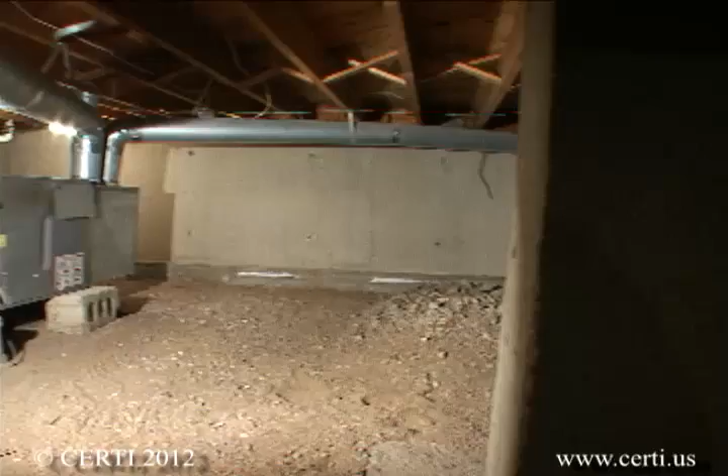The exposed earth of a crawl space provides a major entry point for radon and other soil gases into a home and is an area that should be treated in any radon control project. This is typically done by using a technique referred to as submembrane depressurization, where a durable polyethylene sheet is laid on the soil and sealed to the foundation walls, columns, and its seams.

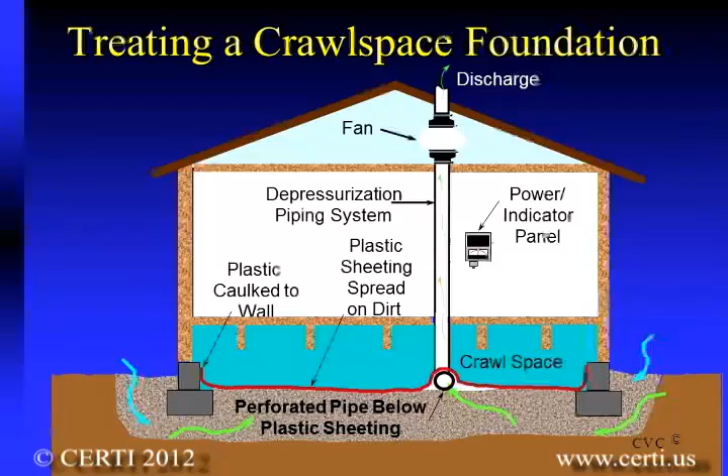Radon is then collected from beneath the plastic sheet with the use of a radon fan and exhausted to a proper location above the eave of the home. Before initiating this work, one should inspect the crawl space for hazards such as friable asbestos, spiders, snakes, and potential hantavirus concerns. If these are encountered, special precautions are warranted, and in many cases a professional should be used to

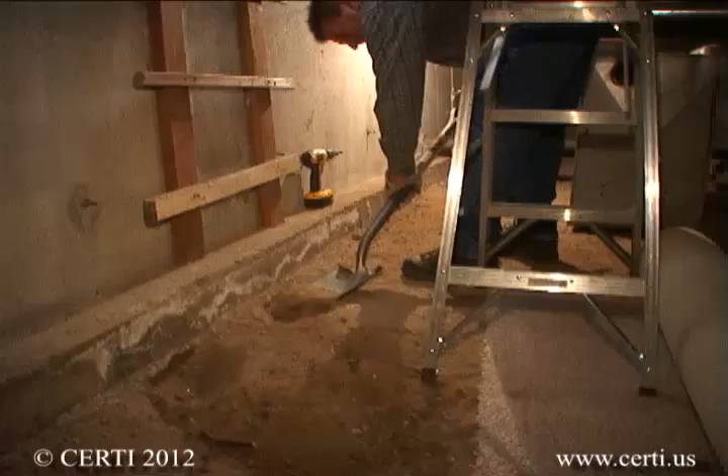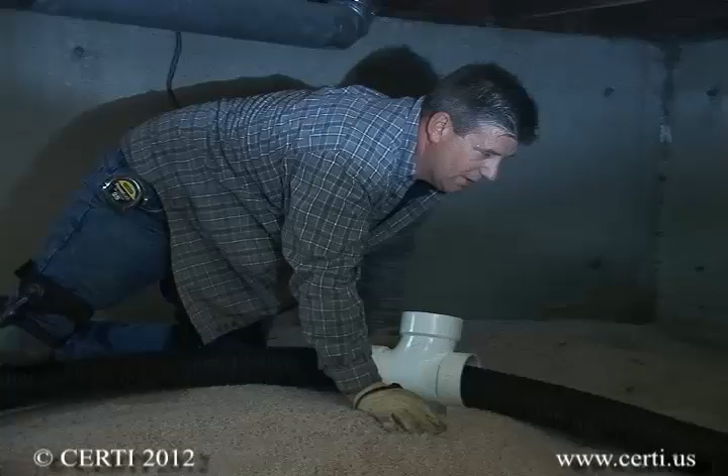implement the repairs. If there are stored materials, excess debris, or sharp objects that may damage the plastic sheeting, these should be removed first. Next, a length or loop of perforated pipe should be laid on the earth with the T-fitting connected to it and positioned in a location appropriate for your planned vent system routing.

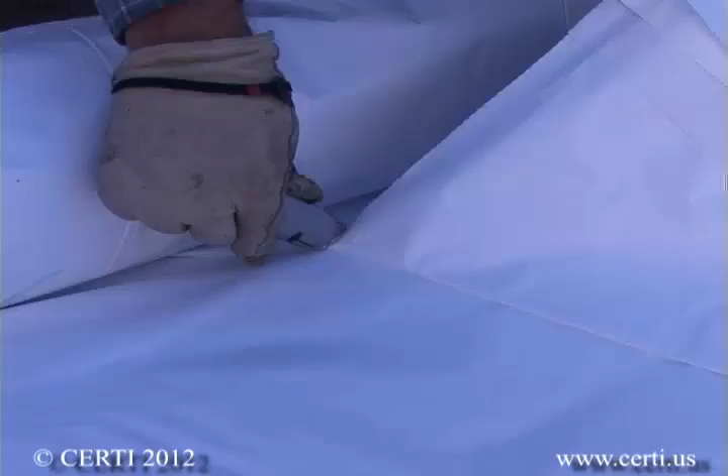Cut the polyethylene sheeting in a convenient location outdoors to the rough dimensions of the crawl space with additional material to allow for overlapping seams and adhering the plastic at least 12 inches up onto the walls. It is also a good idea to lay carpet scraps on the soil in areas of potential traffic to protect the poly when accessing appliances such as water heaters.

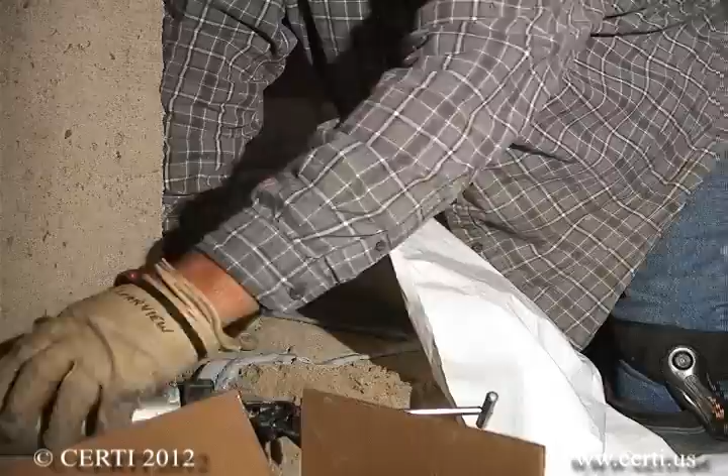Spread a section of plastic out on the crawl space floor beginning with the walls. Apply a thick and continuous bead of polyurethane caulk approximately 8 to 10 inches up on the wall. Press the plastic into the caulk line, which will form an edge seal. Cut your plastic sheeting or use scraps of plastic to seal the barrier to pads and support posts.

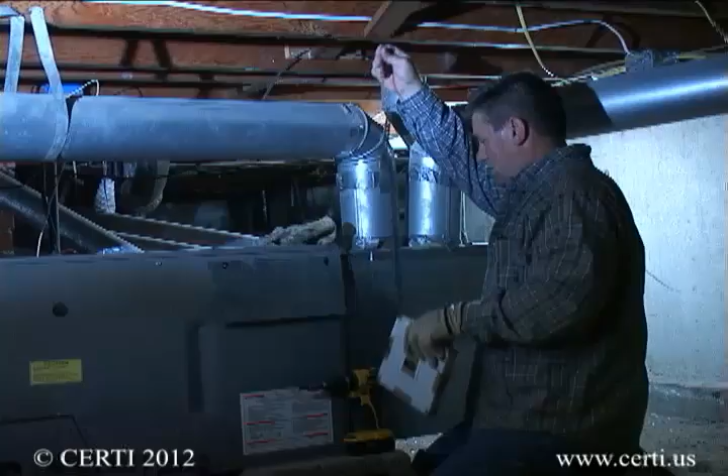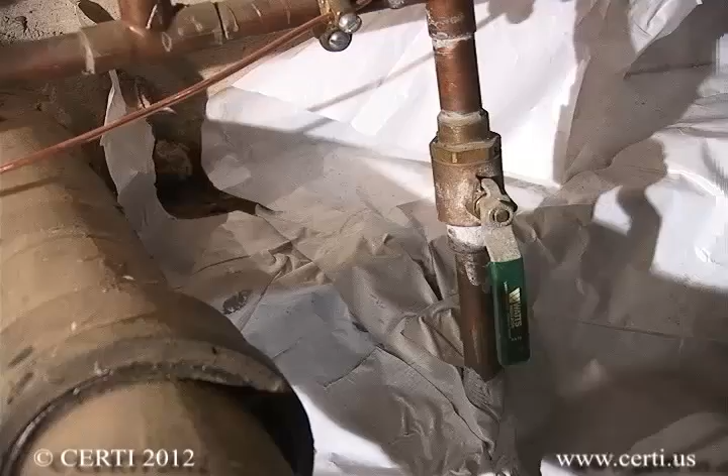If there are appliances such as furnaces in the crawl space, you can seal the plastic to the pad beneath it, or if there is no pad, you can temporarily suspend the appliance with metal strapping, remove the blocks, slide the poly beneath the appliance, and then replace the support blocks. Be sure to also seal around pipes that come up from the soil, such as water or sewer lines, being sure to allow for access to any cleanouts.

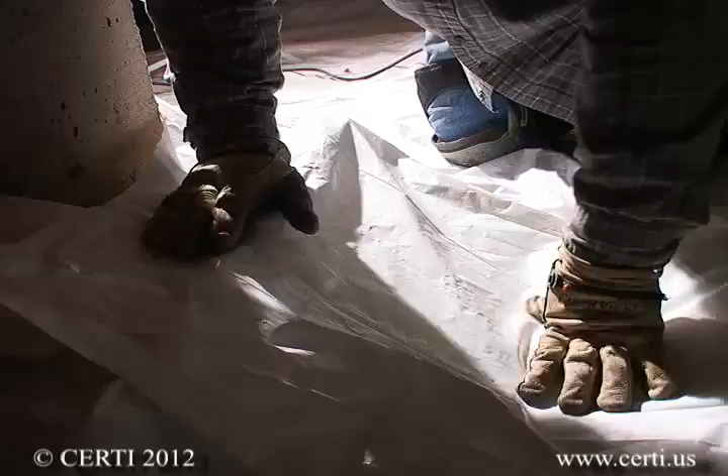After all penetration seals are made, overlap seams and seal them by applying a continuous bead of caulk and overlapping the seam edges. To complete the foundation portion of this system, connect your solid PVC Schedule 40 piping to the riser and route it to your planned vent system.

After the system is complete and the fan is turned on, you will see the plastic drawn down towards the soil, which is evidence of how well the system is working. If you hear leaks or identify them with a smoke bottle, apply additional caulk to seal them.

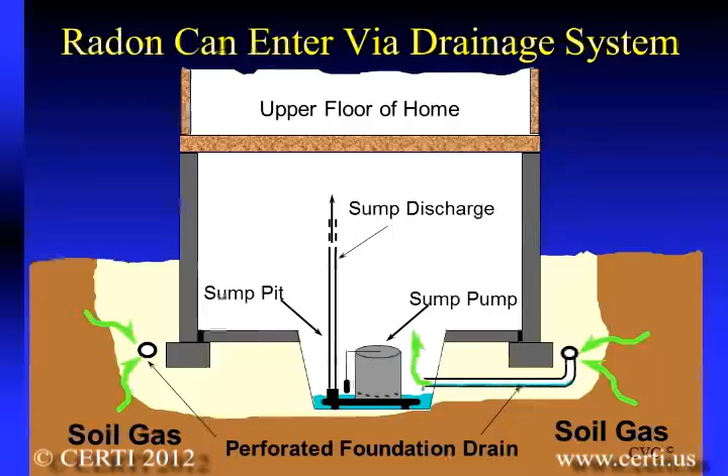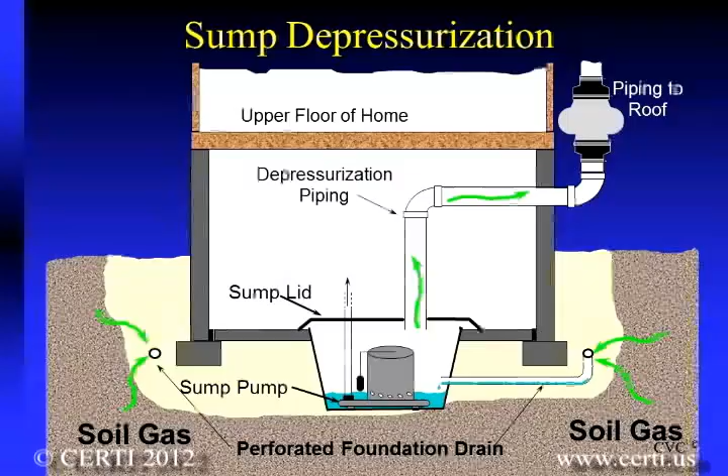Water drainage systems, especially if they are connected to a sump inside the home, can provide an easy pathway for radon to enter the home. However, if you put a sealed lid on the sump and connect your radon venting system to it, you can very effectively reduce radon in your home. Connecting a radon system to a sump is very easy.

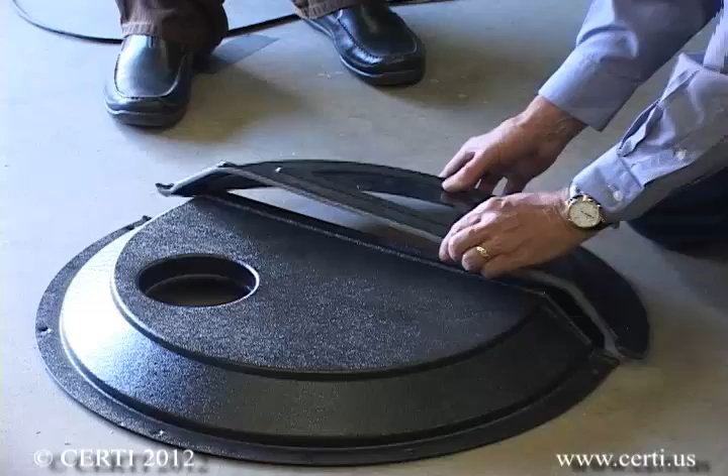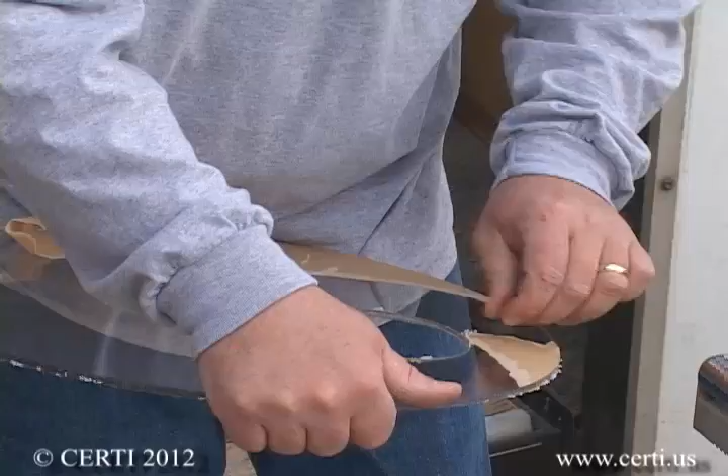There are several commercially available lids that will bolt and seal to the floor, and they also have penetrations for the plumbing from your sump pump as well as for the radon vent pipe. You could also make your own sump lid out of clear plastic such as Lexan, so you can easily look into the sump. If you make your own, you will need to acquire rubber grommets to seal around the pipe

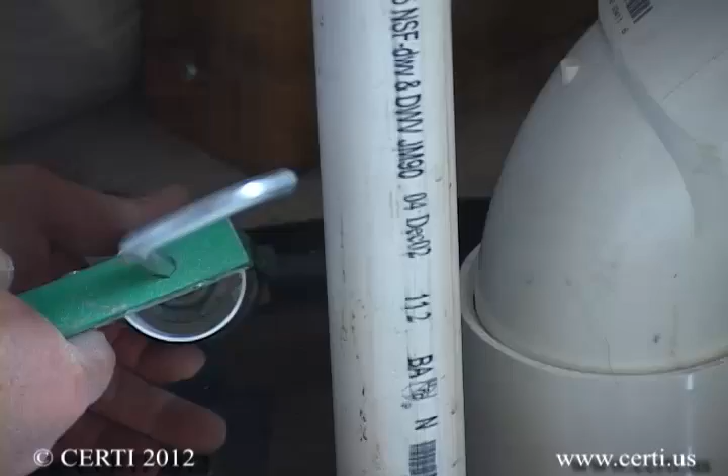penetrations. Regardless of what sump cover you use, it is important to be sure that it seals well to the floor and that you do not do anything that would impede the system from collecting and pumping water away from your foundation. After your sump cover is in place, you can easily connect your radon vent pipe to it and route it to your planned fan location.

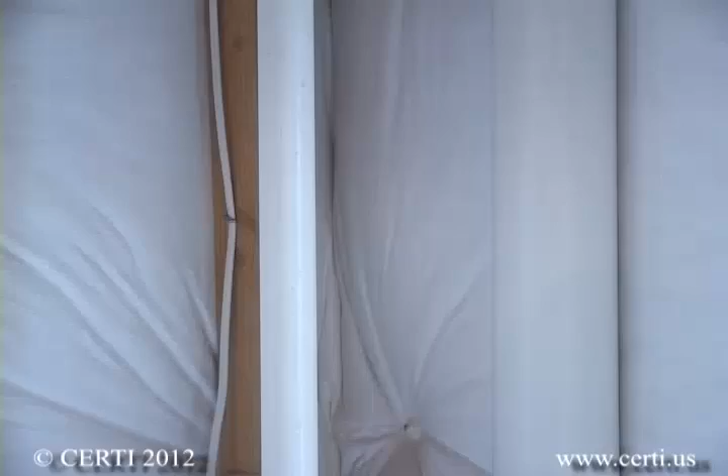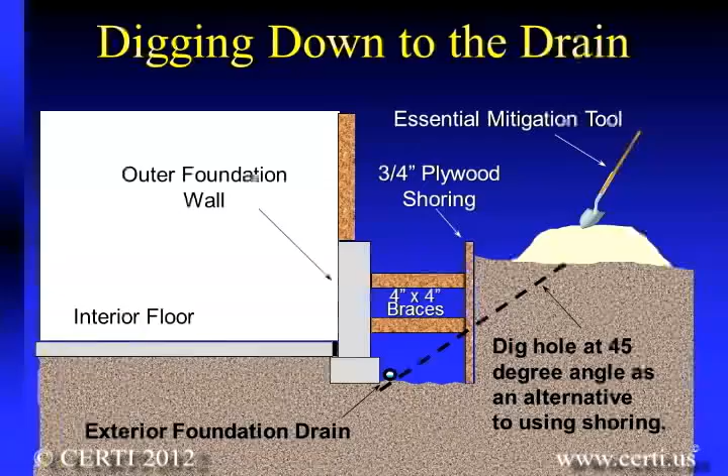If you do not have an interior sump, but rather have an exterior drain located along the footing of your foundation, you can also connect a radon system to it. To connect to an exterior drain, you will have to dig down to the drain, which will typically be near the footing, which will be below frost line. If this is more than 3 feet, you should shore up the hole to prevent it from collapsing in on you. Remove any decorative material or rocks so you can replace it after you are done.

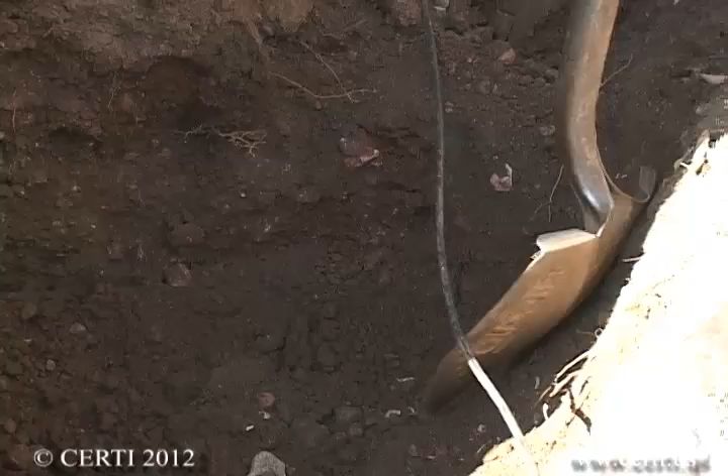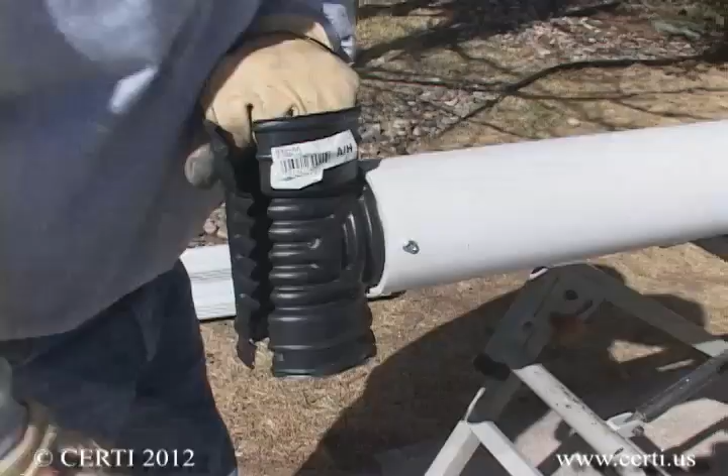It is highly recommended to hand dig down to the drain, carefully avoiding sprinkler and other utility lines. Once you get near the drain, which is located at or below the footing, you will encounter a geotech cloth. Carefully cut and fold this back so it can be replaced later. Once the drain is exposed, connect your 4-inch Schedule 40 PVC or ABS radon vent pipe to the drain. Then lay the geotech cloth back over your connection. Replace the excavated dirt, compacting it as you go, at least once every 6 inches.

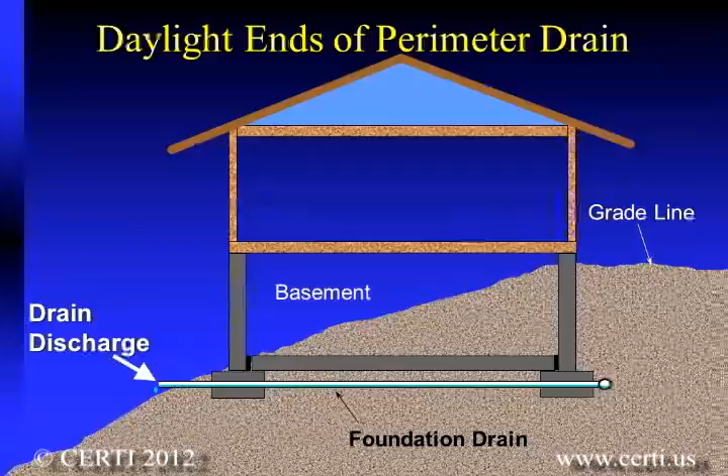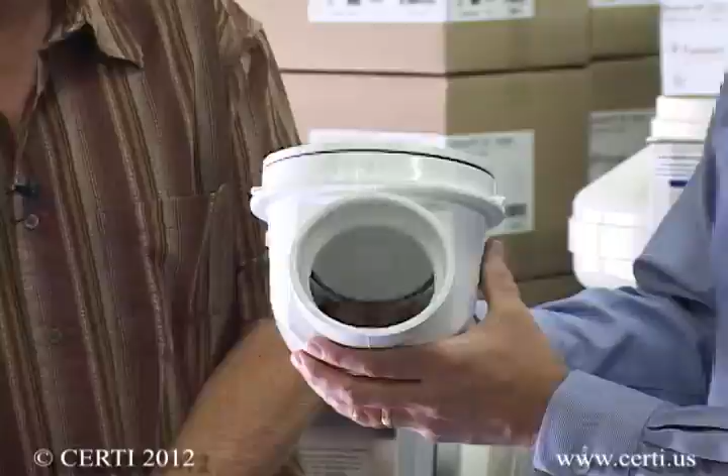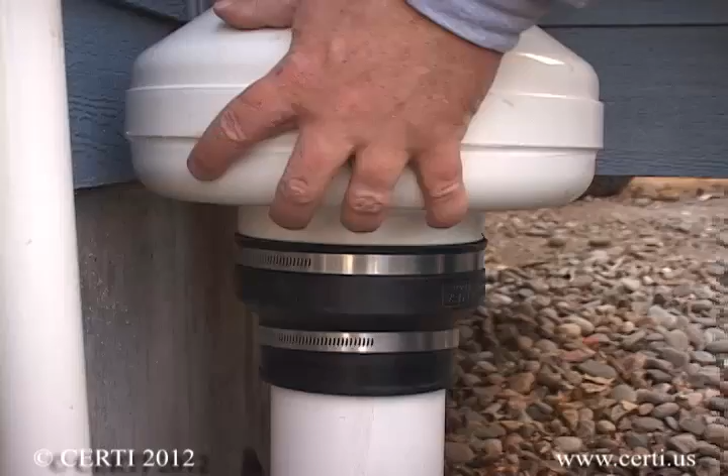If your perimeter drain is designed to drain water away from your home by gravity to a spot on a hillside, you will need to locate the ends of these pipes, and there may be 2 of them. Once located, install a check valve on the end that will allow water to drain away but not suck air from the outside. After you have put check valves on the soakaways and installed the vent riser to your drain, you can connect your radon fan to it. Do not bury the fan, but rather have it located a couple of feet above grade level.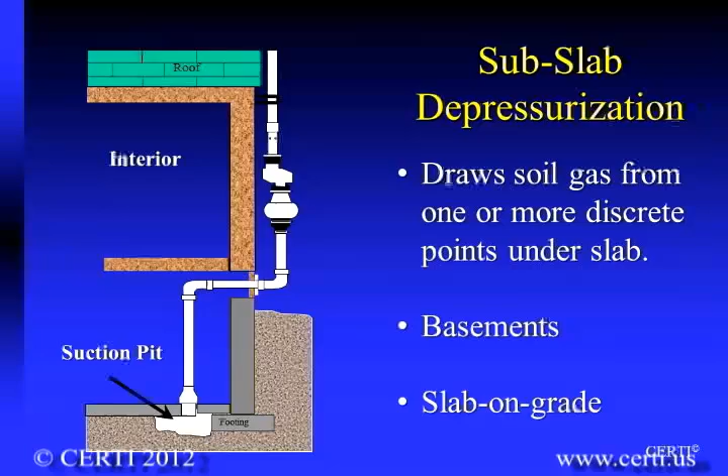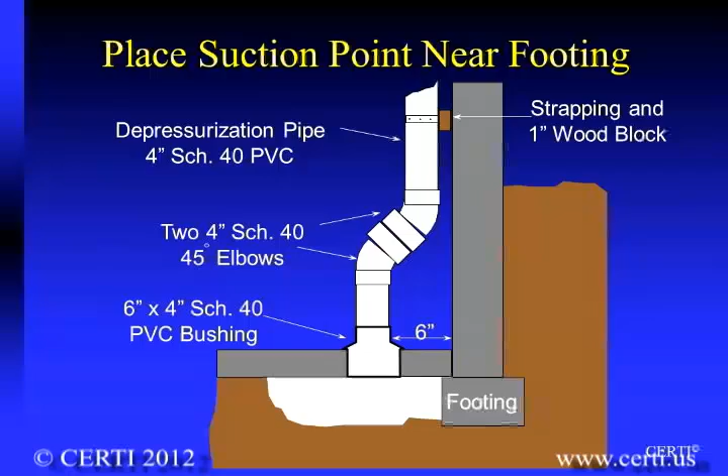Radon and other soil gases can also be removed from beneath the slab foundation when a vacuum is applied to a suction pit created beneath the slab. This technique is known as sub-slab depressurization. The suction pit is typically installed at a location on the slab that is near an outside wall to take advantage of soil settling that typically occurs near footings. It is also a location that typically does not interfere with interior space. In fact, a location in the center of the slab is often the least effective location.

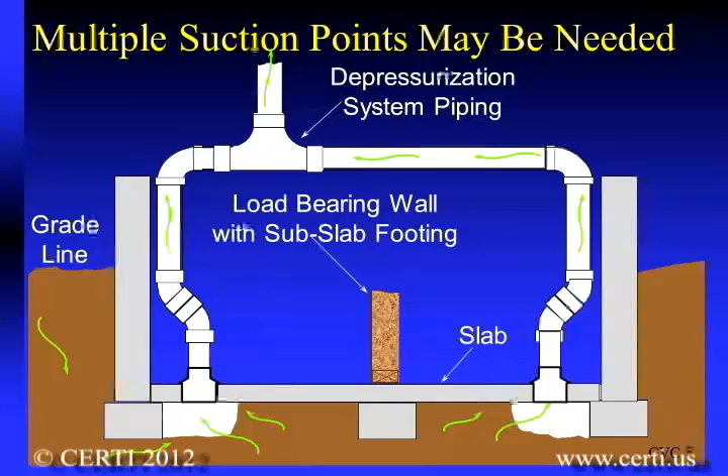For most homes, only one suction point is necessary. However, in some homes where there are obstructions to lateral subslab airflow, like intermediate footings for load-bearing walls, or when home additions are separated by foundations, it may be necessary to have more than one suction point, which will be located on opposite sides of the obstruction, all of which can typically be connected to the same radon fan. Multiple suction points may also be needed if there are more than one slab level. Again, if routing allows, these can be tied together and connected to a single fan.

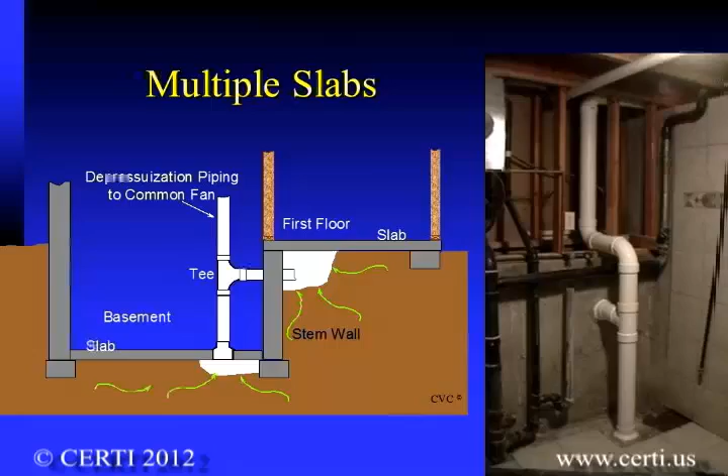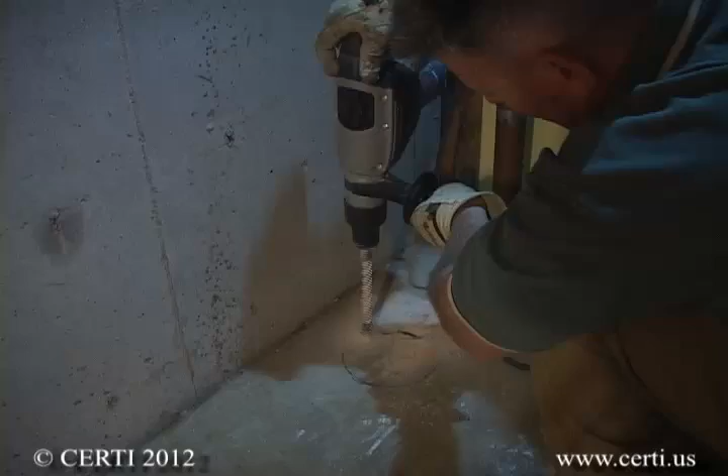The creation of the suction pit is very straightforward, with the floor-to-pipe connection often being accomplished with a 6x4-inch PVC reducing bushing that fits into a 6-inch slab hole and reduces down to 4-inch to accommodate the vent system. To install the fitting, draw an outline on the floor at a point to avoid contacting a spread footing under the slab. Drill the slab along the outline using a hammer drill. A core rig can also be used if you are comfortable with this type of machinery.

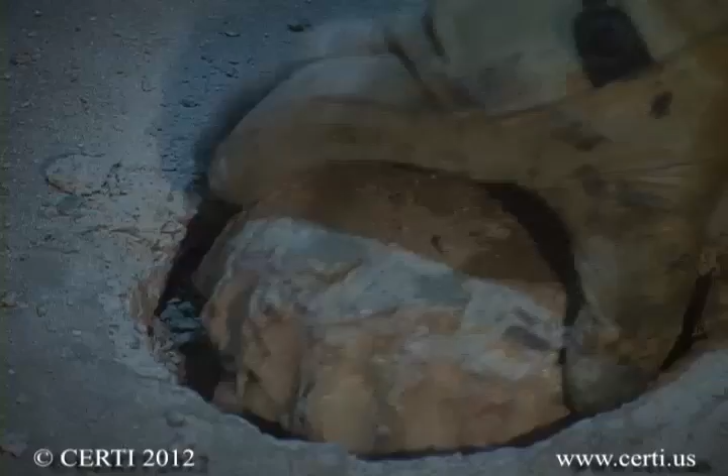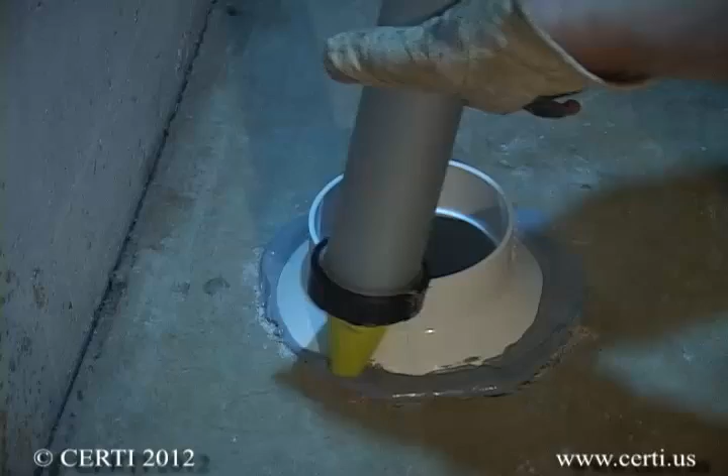After your holes are drilled, chisel out the plug and clean up the edges so your reducing bushing will fit into the hole. It is very important that you dig out a pit beneath your hole, removing at least 10 gallons of soil. Also, the tighter the soil is, the more dirt you should dig out. Install the bushing by applying caulk to it and twist it into the hole. Apply additional caulk between the edge of the fitting and the floor to assure a good seal. After the suction point is complete, simply glue your vent riser to it and route it to your fan.

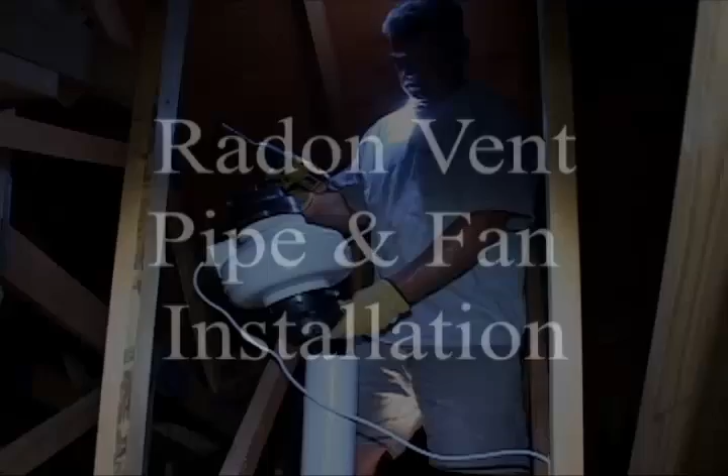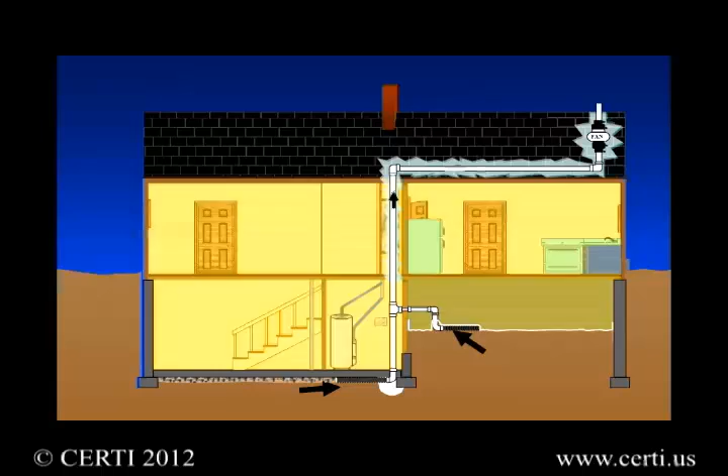The radon vent system is common to all active soil depressurization approaches and consists of a specially designed fan that runs continuously. When it is connected to the subgrade via a simple system of PVC or ABS pipe, radon-laden soil gas will be drawn from the soil and exhausted to a safe location above the home.

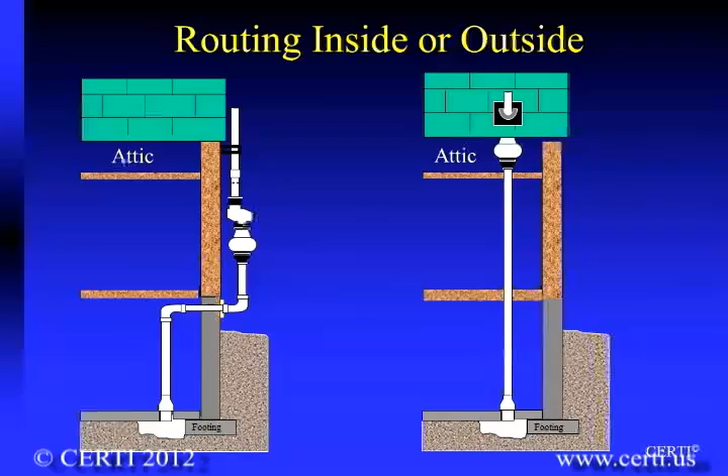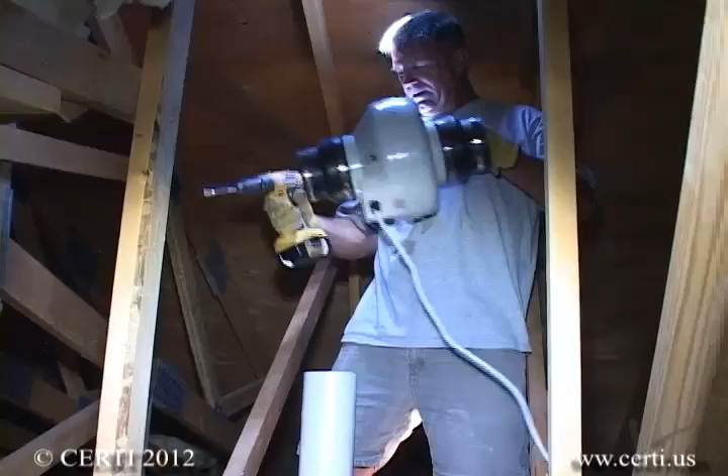The system can either be routed through the interior of the home or up alongside of the home, provided the discharge is above the eave of the house and well away from building openings such that the discharge gases will not re-enter the structure. There should be positive drainage back to the subgrade so condensed moisture does not accumulate and disable the system. The fan and any portions of the discharge piping should not be routed through conditioned space of the home or under occupied space.

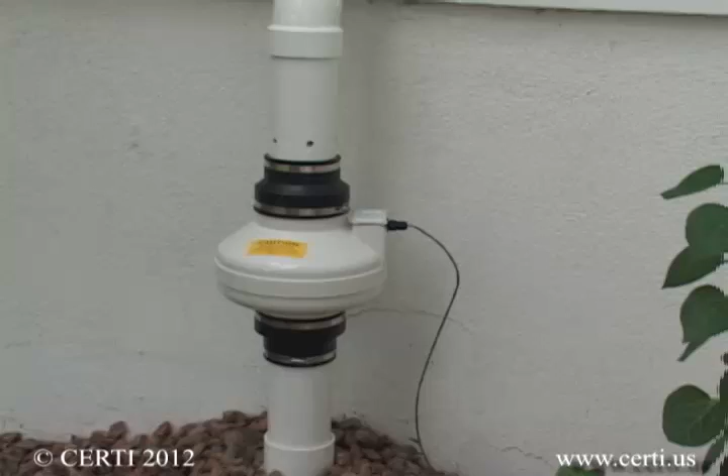Consequently, fans can be located in the attic, garage, or outdoors. They should not be located inside the home, in a crawl space, or in garages with living spaces above them. The fan should be connected to the radon vent pipe with flexible connectors both above and below the fan. It is also very important that the fan be installed vertically to prevent accumulation of water in the housing.

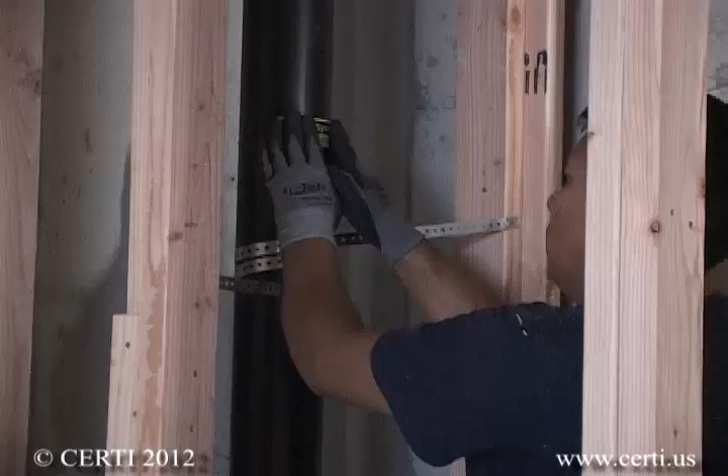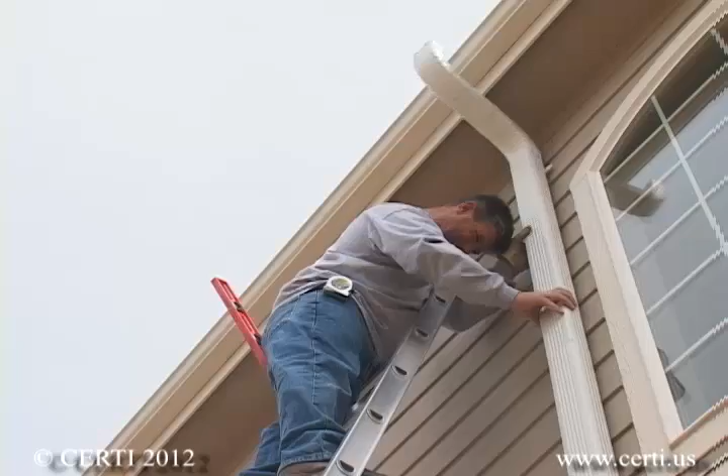As far as the piping, it can be either Schedule 40 PVC or ABS plastic. Sheet metal or flex duct should not be used. All fittings should be primed and glued and the pipe well supported. For aesthetic purposes, commercial-grade downspout can also be used for portions of the system that are outdoors, but do not use downspout indoors.

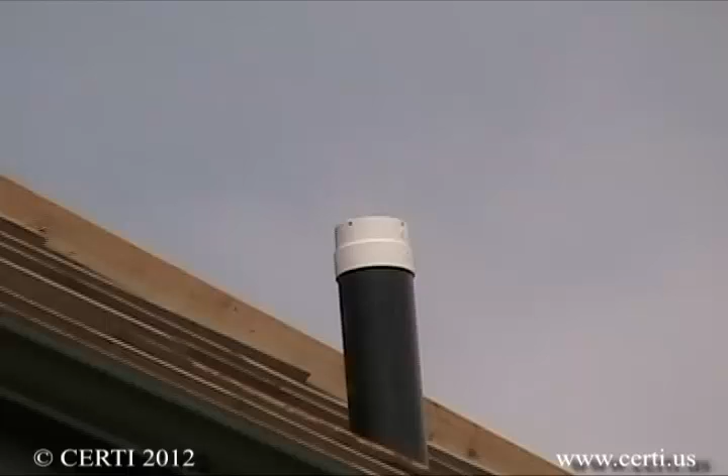Regardless of the type of piping used, the discharge should be routed up to a point above the eave and at least 10 feet away from any building opening that is less than 2 feet below the discharge. It is also recommended that a screen with openings no smaller than a ½ inch be used to prevent birds and squirrels from entering down the discharge.

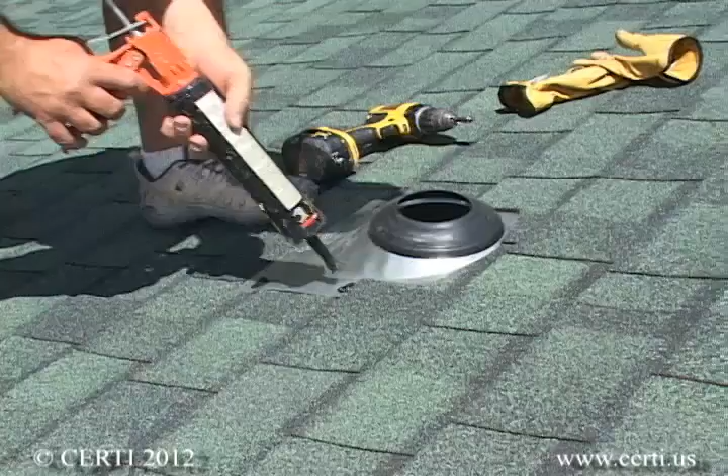Also, if you decide to route the pipe up through the interior of the home, you will need to flash around the pipe to avoid roof leakage. Also, if you run the pipe through a firewall or fire ceiling, it is important that a fire collar be placed around the pipe to maintain the fire rating of the wall.

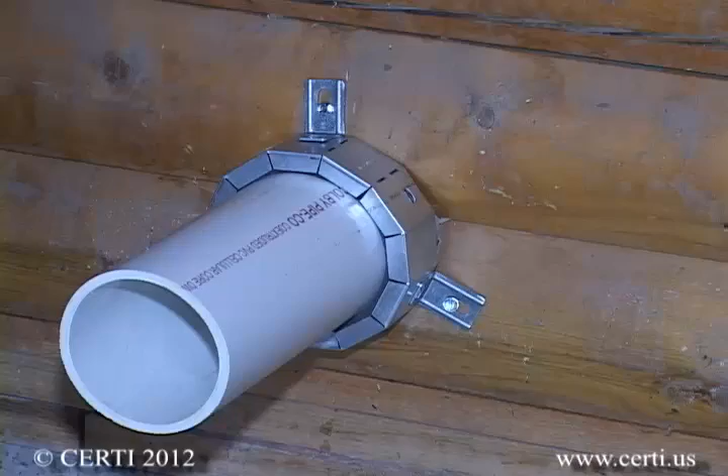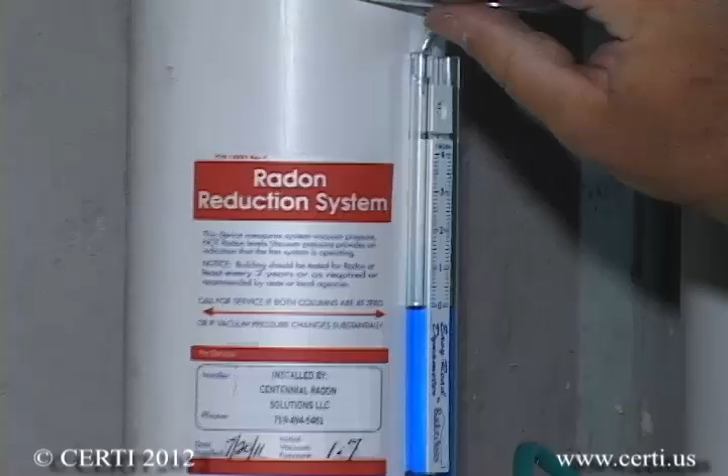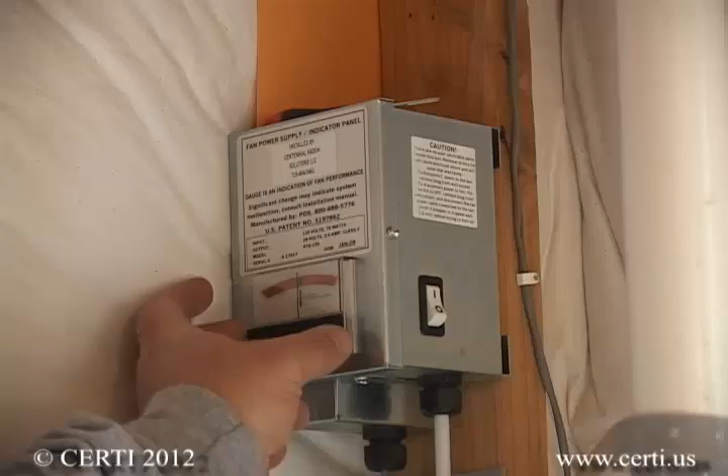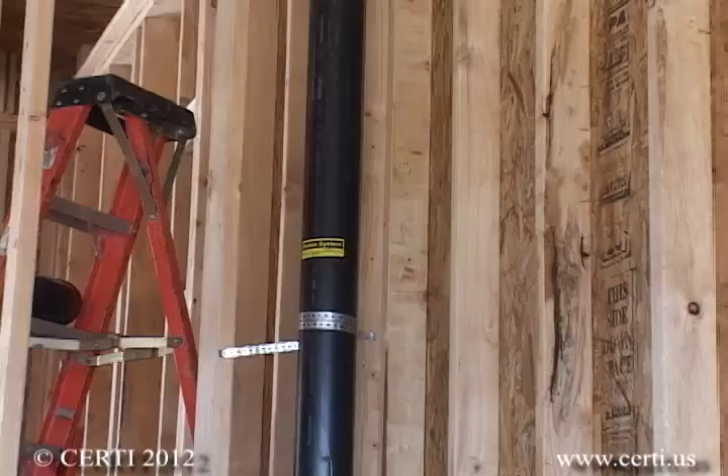Although you will test your home to verify the success of your system, you should also install a performance indicator that can tell you in the future if the system should fail. This could be a simple manometer that measures maintained vacuum in the system, or if you use a low-voltage fan system, it will be a meter that easily indicates if the system should fail, which is very rare. As a finishing touch, you should also label the system at all points it can be seen. This helps future owners of your home understand they have a valuable system operating in their home.

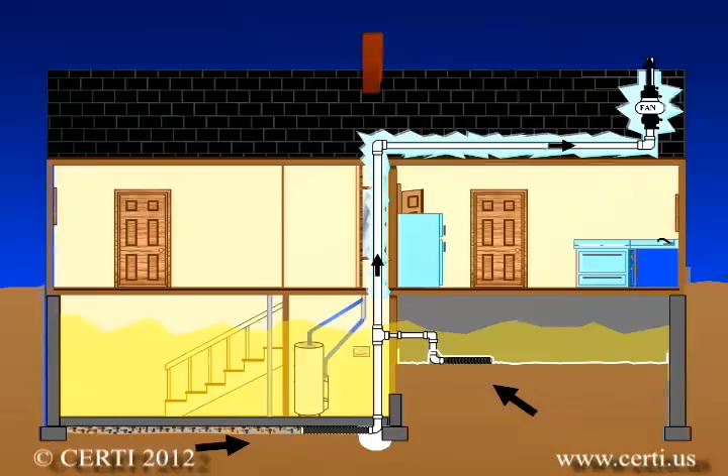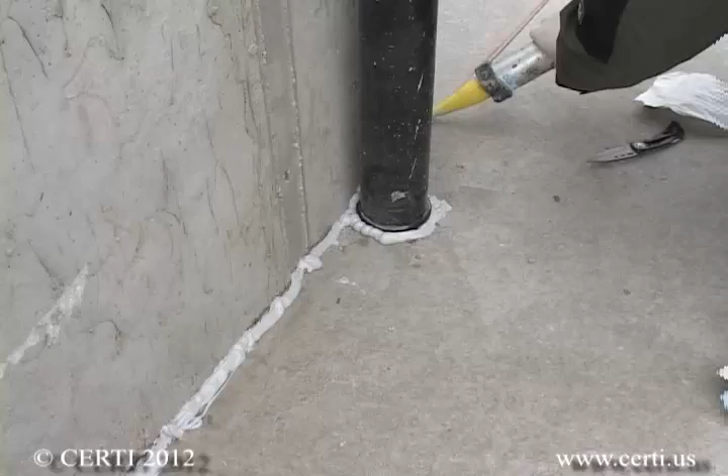Active soil depressurization systems operate by creating a vacuum under the foundation. However, they can also pull air from inside the house via leaks in the foundation, such as slab joints and plumbing penetrations. Whenever practical, one should seal these openings with polyurethane caulk to make the system work better and to reduce the loss of conditioned interior air.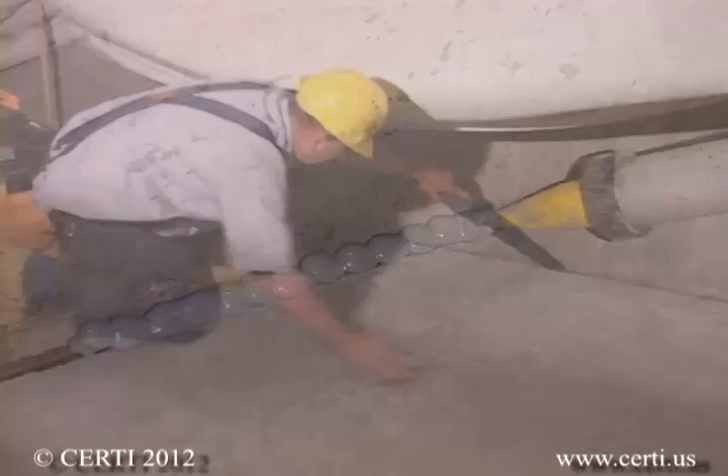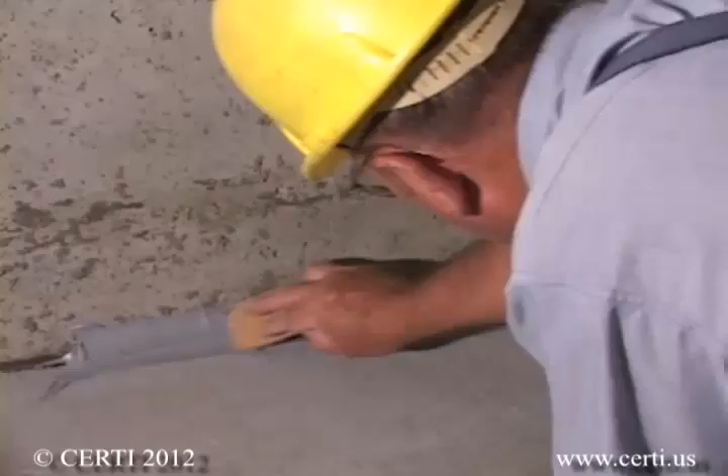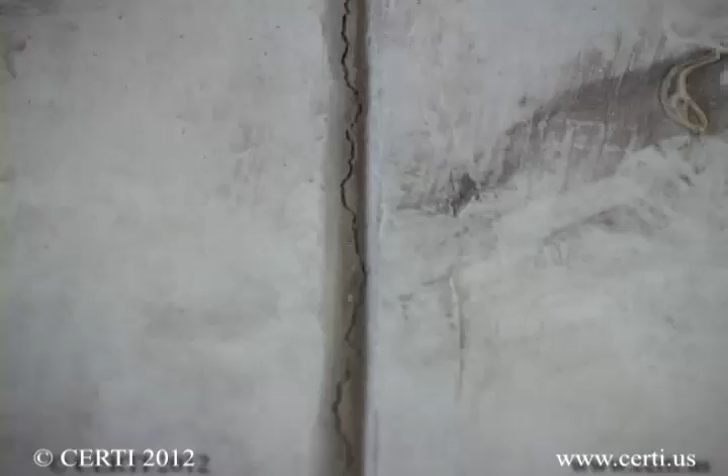To seal a slab's wall joint, vacuum up loose debris and apply a thick bead of caulk. Using a piece of cardboard, smooth the caulk into the joint so it goes up on the wall and onto the floor by at least 3/8 of an inch. If the slab is poured tightly to the wall, as in a cold joint, you should also caulk these joints if they are accessible. If you have control joints that are exposed, and especially if they are cracked, it would be a good idea to caulk these as well.

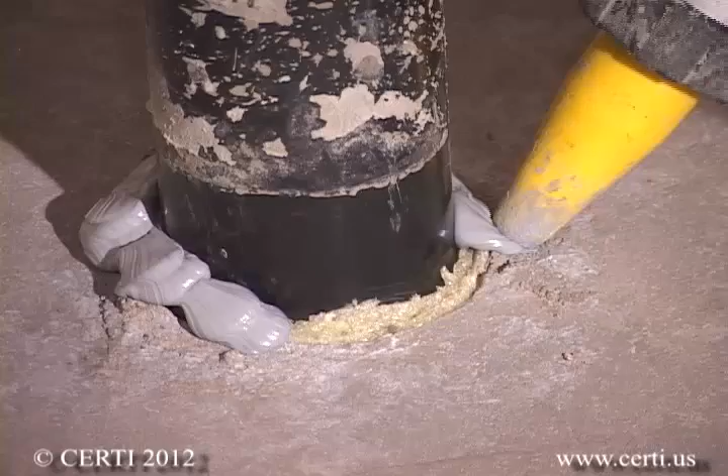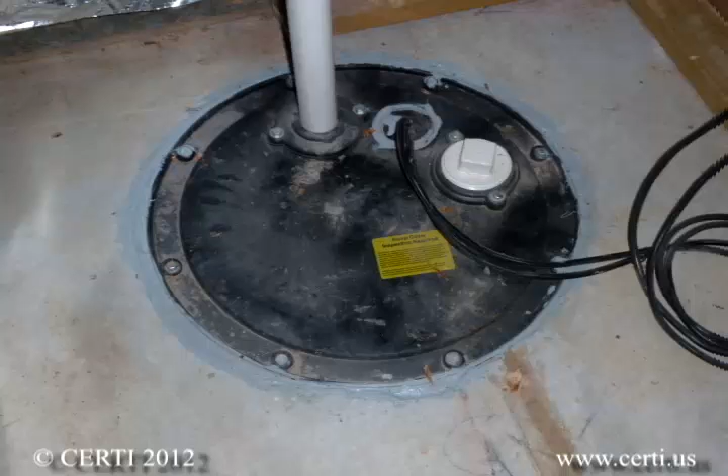Another major leak point can be plumbing penetrations. To seal these, cut back any expansive material and apply caulk completely around the base of the penetration and tool the caulk into the joint. Other places to seal can be blockouts for tubs and showers, as well as installing a gasketed and bolted lid on an interior sump, regardless if you are applying your system vacuum to it or not.

It is typically not necessary to remove wall treatments to caulk joints, but rather caulk those you can access, but you should always conduct a backdraft test on combustion appliance vents to assure they are working properly.